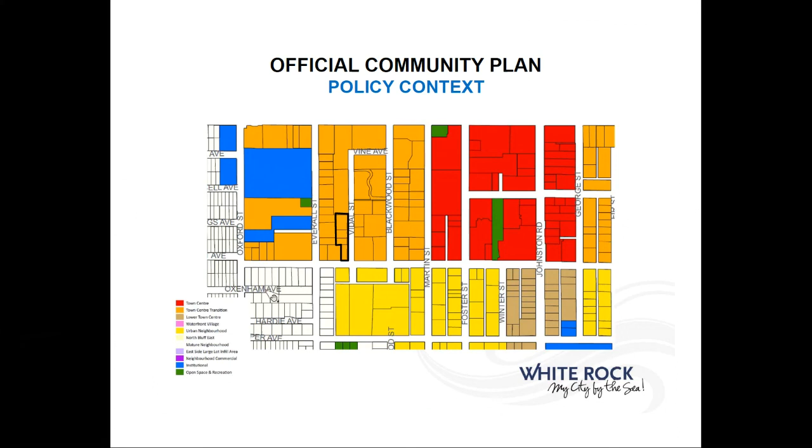I mentioned low to high-rise buildings, and a lot of the discussion tonight may relate to building height - what is a low-rise building, what is a high-rise building. We have a figure in the official community plan that looks at, essentially, a height schedule, looking at potential heights within different parts of the city. You can see the subject properties shown on the screen here with the star. They're within the range of the 12 to 4 transition area moving away from the town center.

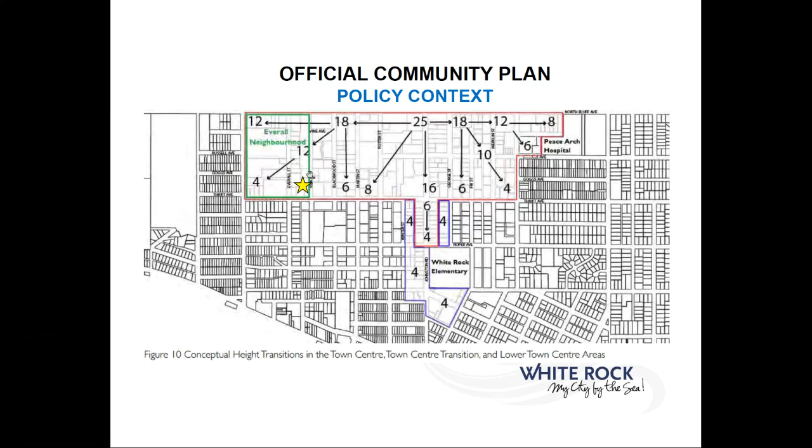In the town center, we have a concentration of taller buildings, 25-story buildings, moving southward down to 16 along Johnston Street, then moving west along Thrift, we transition to 8 and 6, and again moving south from North Bluff Road from 18 to 12 to 4 at Oxford and Thrift.

We also have a measure of density. Density in the OCP is considered on the basis of a floor area ratio, which is a multiplier to the size of land. So if you have a 1 acre parcel and a 1.5 FAR ratio, you get 1.5 times the area of the lot in allowable gross floor area of development. In this particular case, the subject property is within an area where 1.5 FAR is considered.

There are some other policies that I'll speak to that allow for increases to that density, or gross floor area of construction, based on the tenure of housing proposed.

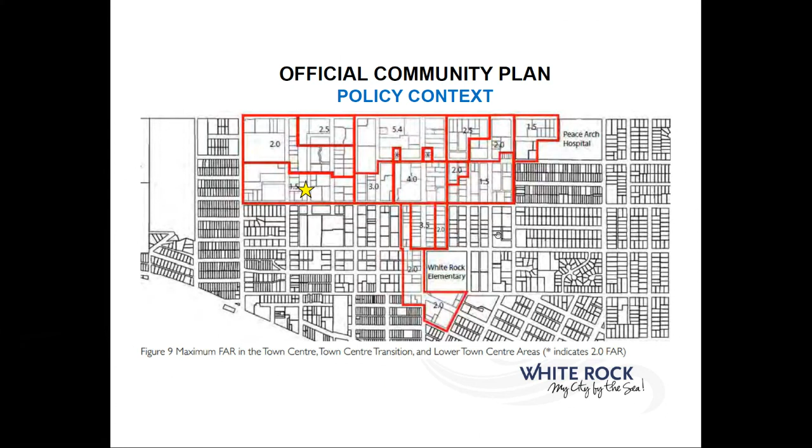As I mentioned, the project is for a rezoning application or a zoning amendment in addition to a major development permit. The property is within the multi-family development permit area. The development permit is really intended to manage and control the form and character of the development.

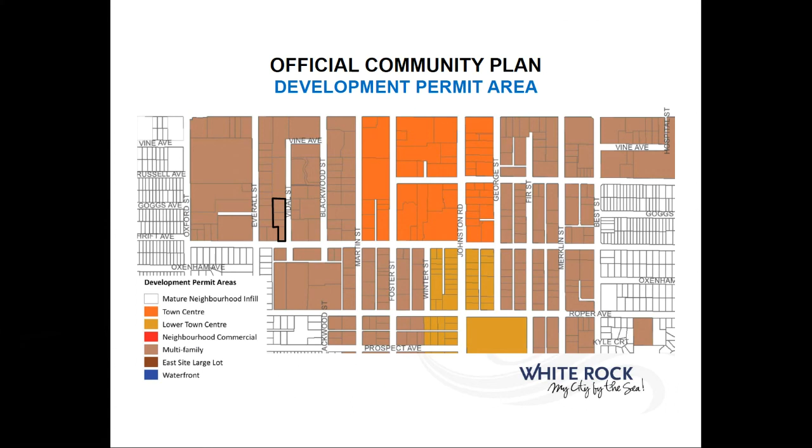I'm going to leave it with the architects from Keystone to go through the design elements of the project and their alignment with some of the DP area guidelines. So with that, I'm going to turn it over to Kim Moust, who is a representative and the vice president of real estate at Weststone Group. So Kim, did you want to share your screen and provide an overview of Weststone?

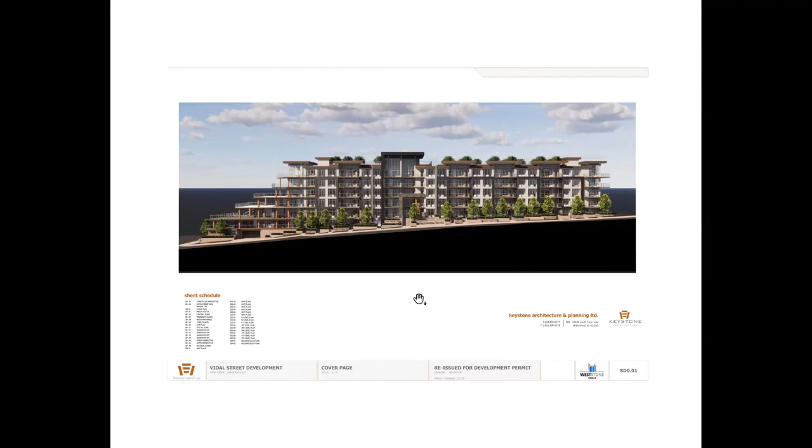Okay, thank you, Greg. My name's Eric Poxletner. I'm a senior architect principal here at Keystone. Noel Lim is the project lead. He's going to walk you through some of the specifics.

Just as an overview, the project is specifically designed with an intent to maximize views toward the south and create a low level, sedimentary approach that follows the site and allows to maximize views from all the neighboring properties. The design comes out of a more natural material, West Coast modernist typology that fits in with a lot of the neighboring and adjacent vernacular architecture in White Rock, with stone, glass, and wood elements. The intent is to feel like a hillside building, unobtrusive, and a wonderful place to live with great rooftop and large balconies to the south.

The main entry is along Vidal Street, with glass elements and stepped stone and wood elements along that side, with points of entry along the ground floor plan, so it feels like a low scale building and fits more into a human scale neighborhood. With that, I'm going to turn it over to Noel to talk a little bit about the specifics of the project.

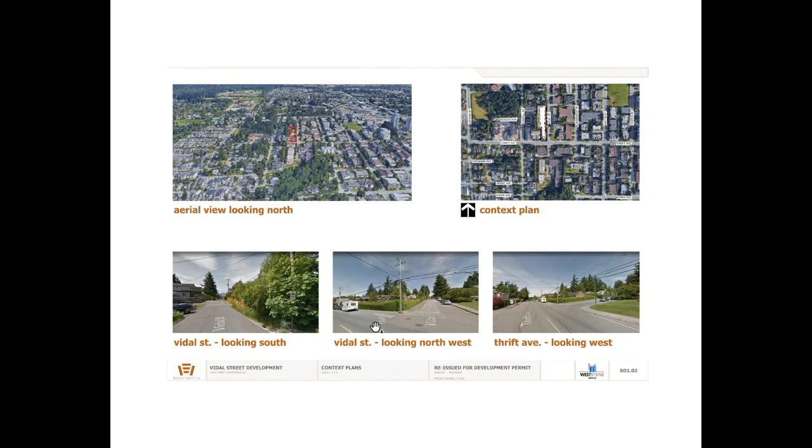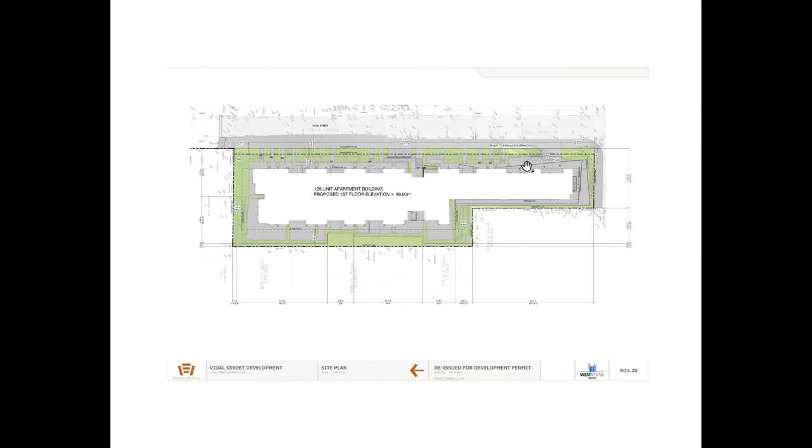Going through the parkade, the access ramp accesses the parkade at level P2, adjacent to the loading zone, and the waste collection is also near the entrance to allow for easy access for garbage collection. There are 19 EV stalls currently located on P2, 3 of which are for visitors and 16 of which are used for residential.

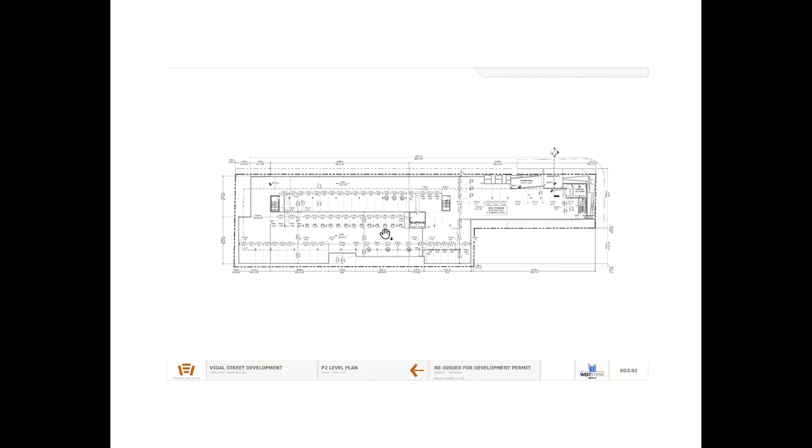The bike storage facilities are located on the P1 level, with access to the exterior via a door adjacent to the main entrance. There are 39 visitor stalls provided on the P2 level, as well as 155 residential stalls provided on all 3 levels, secured by parking gates. There are a small number of residential units on the P1 level, which peek out due to the slope of the site, and the service rooms are also located on P1.

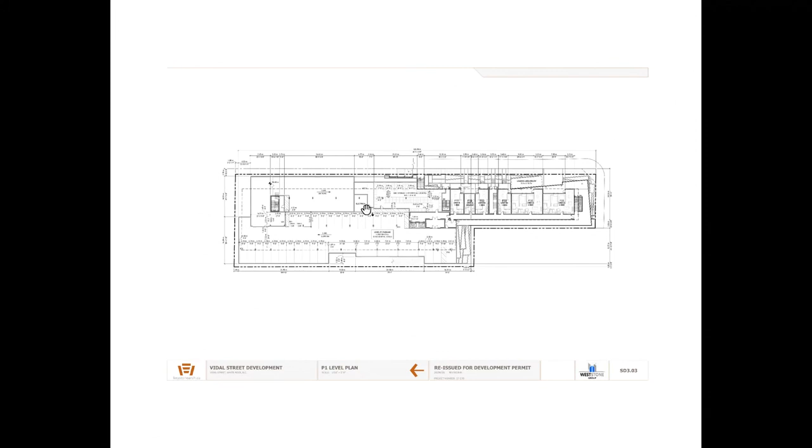On the first level, you can see that the main entry is again near the center of the building. And we've also provided walk-up access to units ranging in size from studios up to 2-bedroom units.

The first of two amenity rooms is located on the south end of the project, with a large amenity deck to the south to maximize the views. The interior space is about 1,200 square feet, and the exterior amenity space is just over 2,000 square feet.

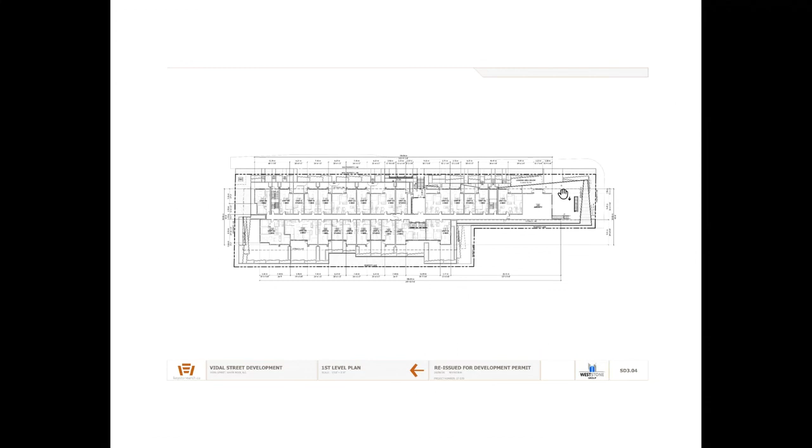Moving up to the second floor plan, there is another amenity space just over 500 square feet, and another deck just over 1,800 square feet to finish off the interior and lower portion of the amenity space.

Moving on to the 3rd through 5th levels, our unit mix includes 25 studios ranging from 323 to 373 square feet, 55 one-bedroom units from 446 to 547 square feet, 36 two-bedroom units from 585 to 978 square feet, and finally 13 three-bedroom units from 918 to 1,063 square feet.

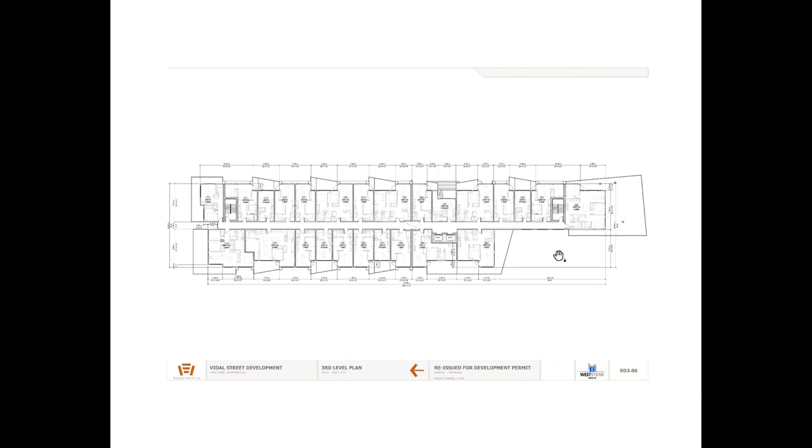Lastly, to close off our amenity space, we have a rooftop outdoor amenity deck with the majority covering the roof, totaling 9,775 square feet of outdoor amenity space.

Now I'll pass it back to Eric to go through the architecture.

Speaking further to outside amenity spaces and walkability and livability, in terms of how we approach the architecture, there's a lot of landscaping along the perimeter, with stone, stepping, and terracing.

In terms of materiality, we used wood posts and metal panel to finish off some of the exterior elements, with some slate-like flat stone material around the entrance and manufactured stone along the perimeter.

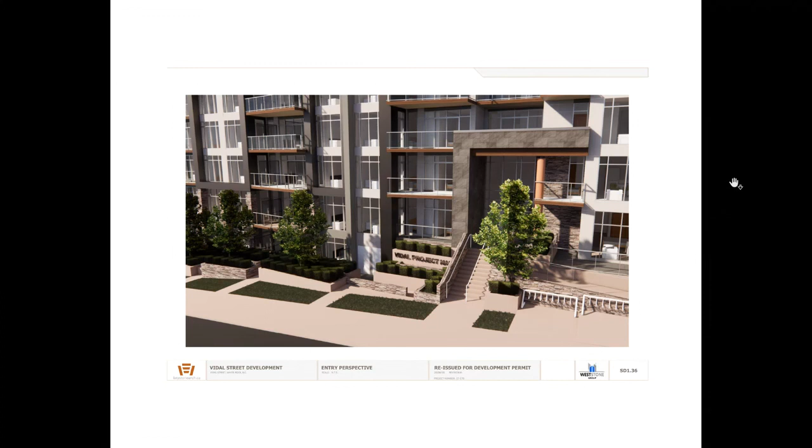There's the main entry coming into the building with bike racks along there, and landscape terraced areas as it moves down the street.

That's to the north of the project, facing the existing site up to the north. Generally we're trying to keep the scale of the building feeling very human scale, not obtrusive.

I think I'll turn this over to landscape. Did you want to go over it?

This is just a section showing the existing building to the north of Beverly, and how there was careful thought in this building to try to keep good views from that building out down toward the ocean.

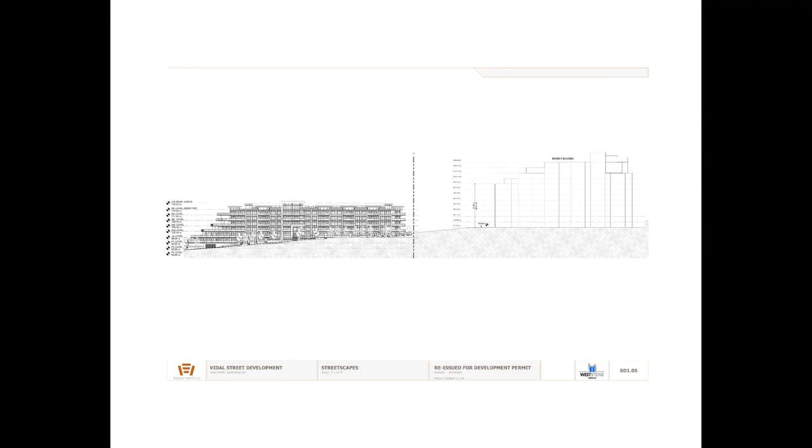I'm just going to go through some CPTED crime prevention principles, some sustainability principles, and a brief overview of the traffic report.

We've allowed for clear viewpoints throughout the site. Residential windows and balconies all look over the site to make sure that there are clear visibility lines.

There's going to be a secured underground parkade for residents and visitors, and site lighting will illuminate the public areas. In terms of natural access control, there's one clearly defined residential entry point.

And as Kim has gone through, there's an extensive maintenance and management program already instituted by Weststone.

Bike parking includes 129 tenant bike stalls and 27 bike rack units on the exterior. We also have an allowance for 19 electrical cars, as we've gone through already.

We plan to meet or exceed all of the new energy and ASHRAE code requirements. Exterior lighting will be dark sky compliant and use LED fixtures.

We have located our underground parking underneath the building to minimize asphalt and maximize landscaping, which landscape will go through shortly.

For the traffic highlights, the study area is located in close proximity to existing transit routes and regional cycling routes. There are existing pedestrian facilities provided on the study roadways as well.

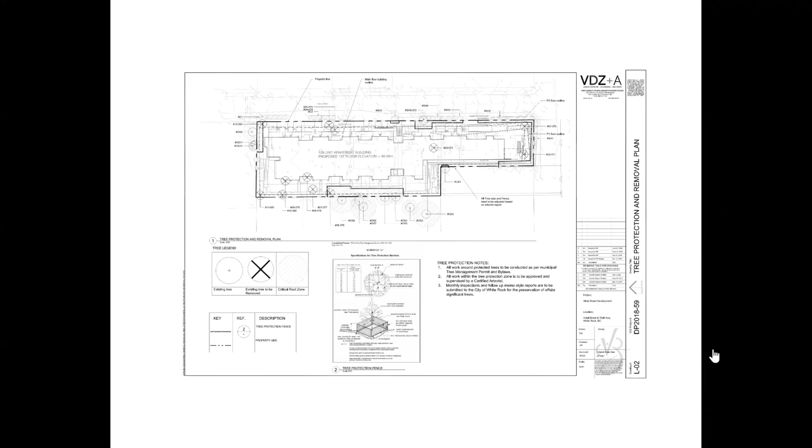Good evening, everyone. I'm Derek with Van der Zalm + Associates, and I'm going to briefly take you through the landscape for the Vidal project here.

Firstly, I'm going to draw attention to the extensive work that has been done to ensure that all of the offsite trees to the west and north have the best opportunity to continue to grow and thrive. Along the west side, we've had arborists on site to map how much of a critical root zone there is. The building envelope has already been adapted so that it will not impede into those critical root zone areas, as well as to the north along those existing trees. Arborists will also be on staff during excavation to monitor these trees and ensure they have the best chance to continue to thrive and grow.

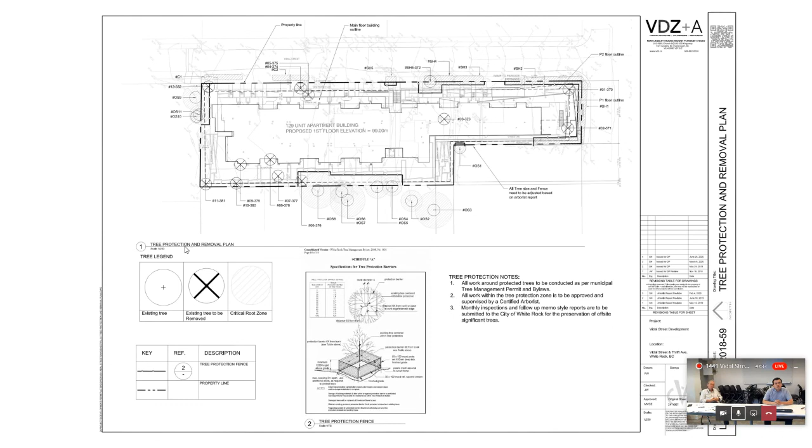Now we're going to work our way from the bottom up and take you through some of the landscape elements. This is the P1 level, showing some of the tiered landscape that works with the idea of a running downhill, tiered hillside, as well as showing some of the private patios for units on the P1 level here.

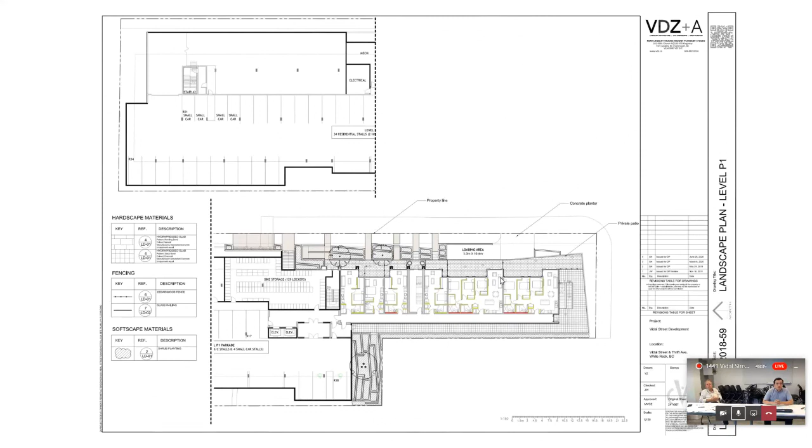For the main level, we once again have the tiered landscape along Vidal with retaining walls building up to the private patios, providing a bit of privacy so people can be outside and enjoy their outdoor space while having a nice landscape buffer between them, as well as along all the edges of the building. There are private patios on the level 1 floor, and then down into the amenity area on the south side overlooking towards White Rock. Here we have lounge chairs and sun decks, as well as planting and casual seating to allow people to come outside and make use of the space and the views from this area.

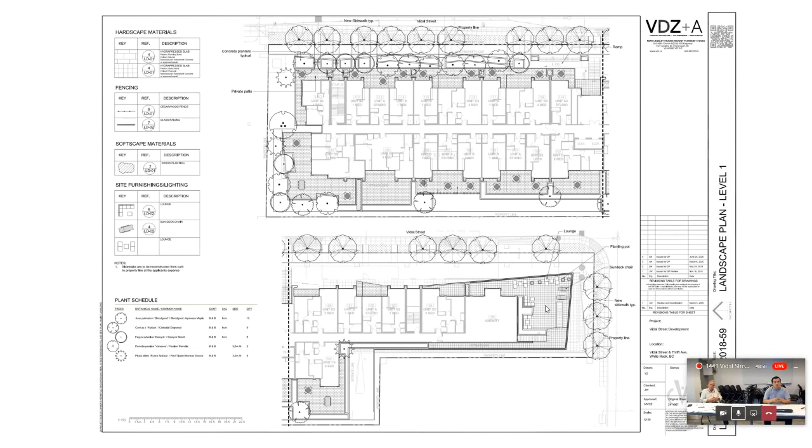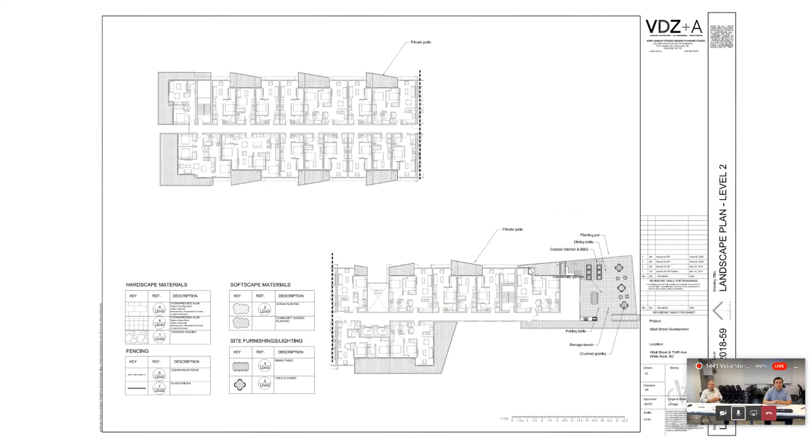Moving up to the level 2 plan, we have private patios as well, and mainly the amenity area where we are featuring an outdoor kitchen, harvest tables and casual seating, as well as community garden boxes and a potting table to allow people to come and enjoy the sunshine and the views.

Finally, up to the rooftop, where we are featuring raised planters to green up the roof, allowing trees to grow as well as shrubbery, and also bringing in a graphical element to the design with a green roof and pathway through there to make it interesting to look at, as well as having a trellis, casual seating, and built-in seating with fire pits to allow the users and residents nice amenity areas up top. And finally, with some movable tables and chairs, and a dining area to once again bring people out, looking closer to the views to the south.

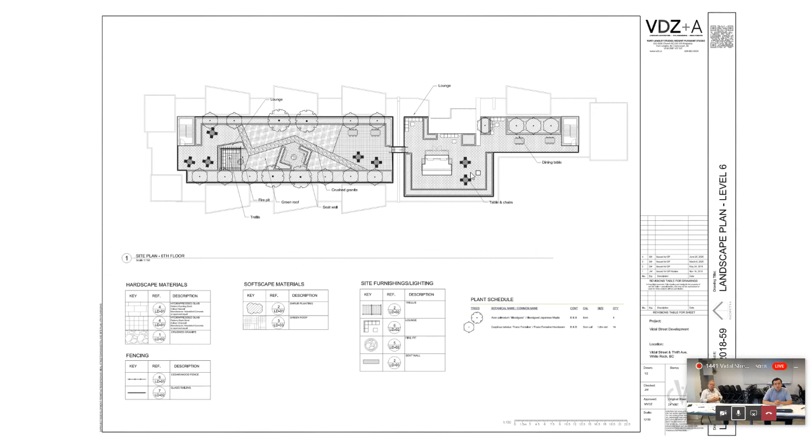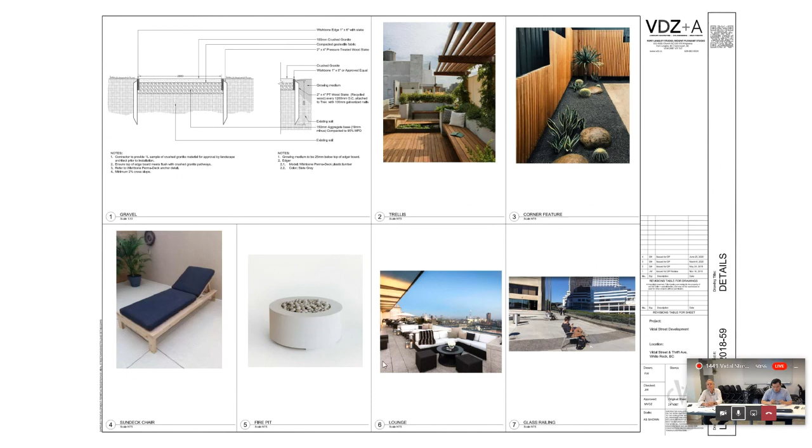This is just some of the grading, showing that we're being cognizant of the offsite conditions and trying to work it into the landscape, and then showing some of the character of the landscape elements we're proposing, playing off of the architecture with the wood and metal beams, as well as some graphical landscape elements that become a focal point within the landscape itself. Fire pits and sun decks, lounge chairs, as well as glass railings across.

Going into the green roof, using sedum and such to make it have a bit of a graphical representation across the top, and then the built-in seat walls, community garden, and outdoor kitchen area.

And I believe that is all I have for landscape. I'm not sure who's going to be taking over from here.

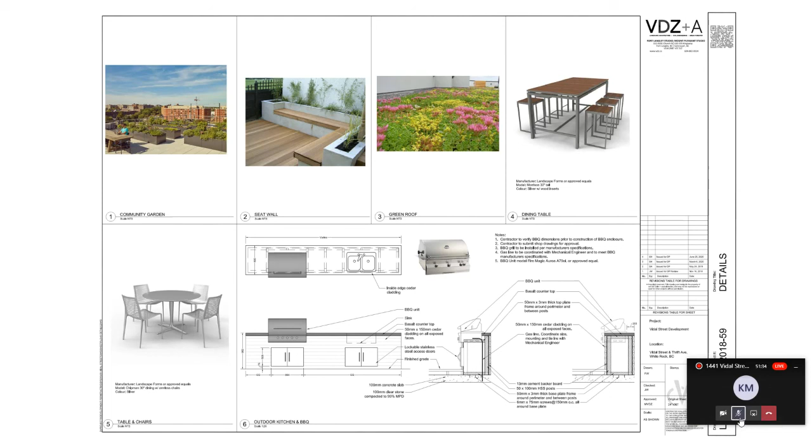Hi there. Sorry about that, I'm troubleshooting some issues on the other end. I'm going to share my screen again, so...

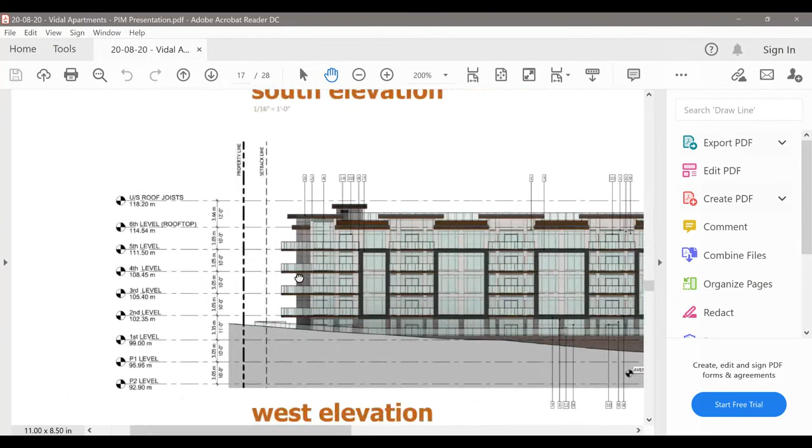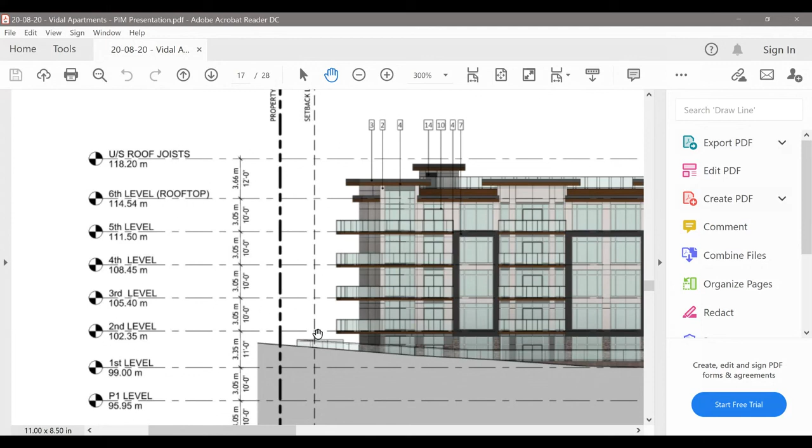Sure. So this would be the north side on the west elevation, showing the first story essentially below grade with some allowances for patio spaces. So you are correct, it is about 4 stories, including a rooftop deck amenity - 3 was a little bit under. But as you can see, it is substantially lower than the 6-story height shown on the south side of the site.

Okay, thank you, Noel. I've published a couple other questions if you want to speak to them about how the roof deck may contribute to building height. The question is, does the roof deck effectively make it a 7-story building?

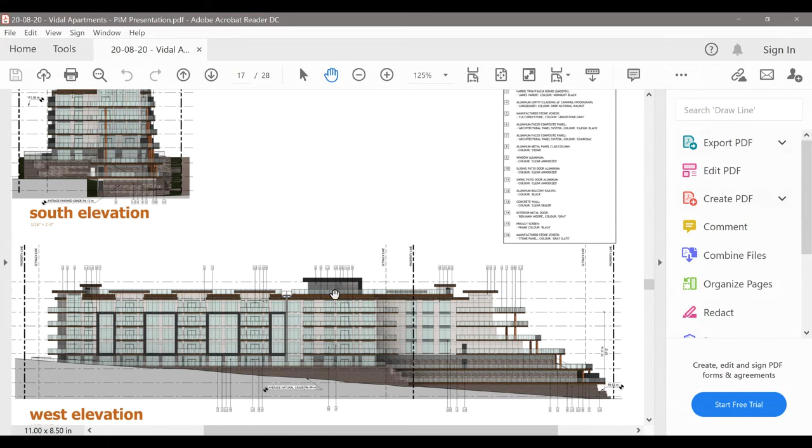So the only portions of the building that stick up above the 6th story are the stair cores and the elevator core. By code, that doesn't qualify the building as a 7th story, and they are minimal in terms of actual footprint of the roof, so they don't really intrude or create too many shadow lines from that height.

Okay, thank you. A couple related questions: is it a wood frame building or a concrete building? It'll be non-combustible, so concrete.

Changing themes a little bit, there's a question about accessibility. As mentioned in the parking summary, the parking plan proposes 5 barrier-free spaces. Will any of the units be designed to be accessible units?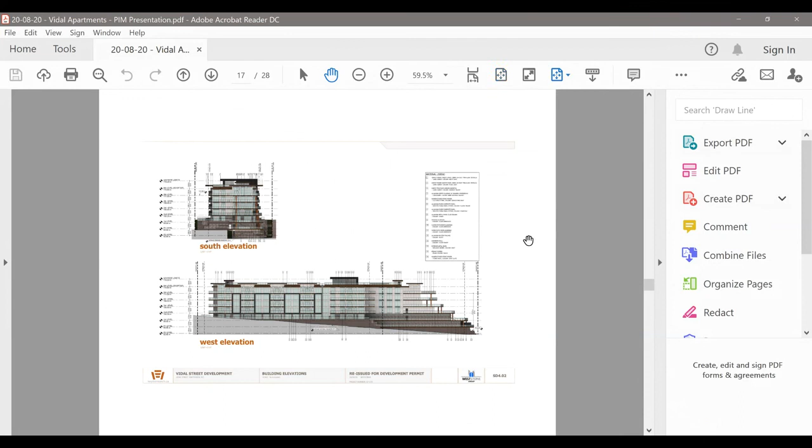I believe we have allowances for it right now, and that'll be on a per client basis. If our client Weststone believes that more spaces are needed, then we'll account for that. In terms of the unit composition itself, will any of the units themselves be designed for accessible access? Currently, they are not.

I'll publish there's a question here. Sorry, Kim. Hi, Greg. We will make accommodations for some of the units to be handicapped accessible, and may also ensure that we have pre-wired for automatic openers so that doors are accessible. So we will certainly be making accommodations for accessible units going forward. Okay, thank you.

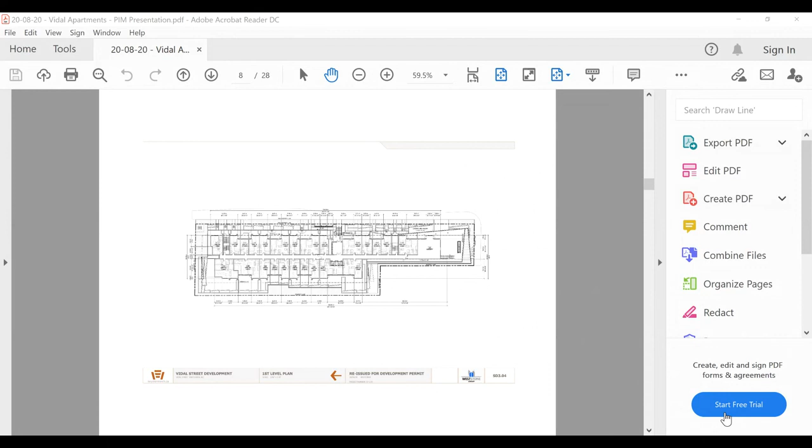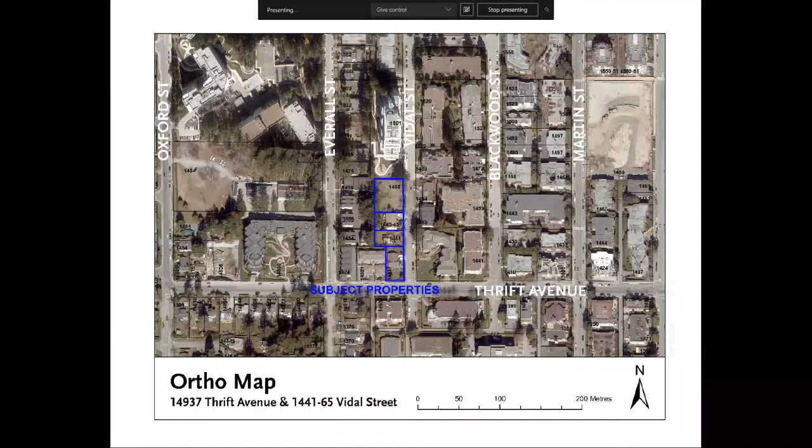I published a question. It says, to clarify, the proposed upzone increases maximum units from 12 to 129 and increases density to maximum allowable under OCP with the rental density bonus. And that's correct. So the proposal is proposing 129 rental units with a 2.1 floor area ratio, which would be the 1.5 recognized in the OCP plus a 40% increase with the dedication to rental tenure units.

I think perhaps I'll ask Jonathan to take the next handful of questions regarding parking and the traffic study. So there's a comment about parking already being a problem on Vidal. How will that be managed with the massive increase in residents on a quiet street?

Maybe Jonathan, I can start on a couple of the ones regarding on-street parking, and then if there are related ones about the actual traffic, I'll direct those to you.

So the one thing I wanted to point out on the on-street parking: right now there's only parking on the east side of Vidal. As part of the project, the city is looking for a dedication of land, a widening of land, to ultimately support a more complete street arrangement. So as sites are redeveloped along Vidal, the city has an opportunity to seek a dedication of land, a widening. That would be sought, and has been communicated to the proponent in this case, to eventually have sufficient road width to have 2 lanes of traffic and then parking plus a boulevard and sidewalk on both sides of the street.

Regarding... I'm just reading the questions as we go to make sure I'm grouping them. So Jonathan, a question here.

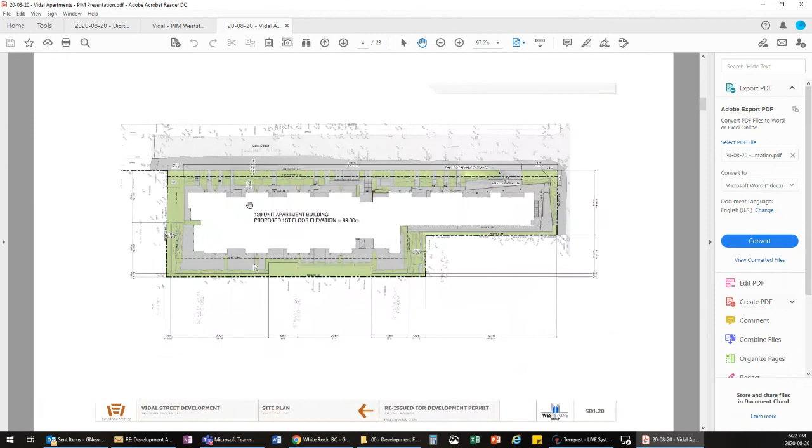A question about the setback of the building from the north side. I'll put the drawing up on the screen. There's a question about this 3-meter setback at the north end of the building, where the standard in the high-density residential, multifamily apartment style zone is 6 meters. I wanted to clarify that the 3 meters proposed largely encompasses the open-air balconies and portions of the parkade, whereas the actual tower portion of the building is closer to 6 meters from the north property line. So on plan view it looks like a 3-meter setback, or that's what's labeled on the drawing, but the actual setback of the structure, based on our measurements and review of the file, is between 5 and 6 meters. Just to clarify that point.

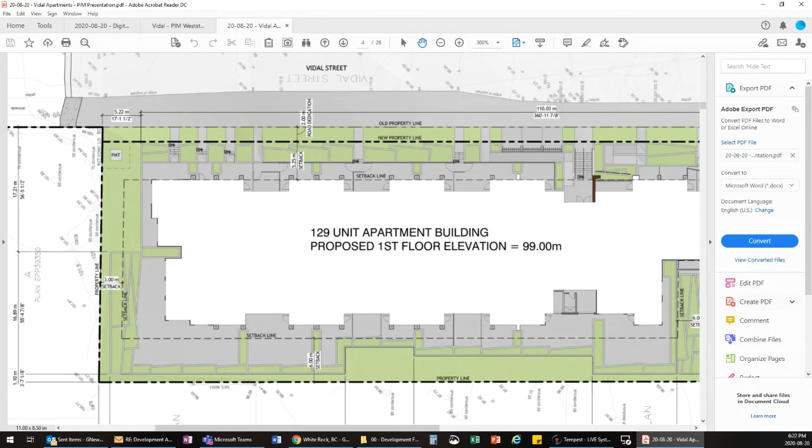A question about community amenity contributions. Because the project is seeking additional density, going from what the zoning would generally allow, around 1.75, up to 2.1, the rezoning process gives the city the opportunity to have a conversation about community amenity contributions. If council wishes this project to proceed, we would be having those conversations with the applicant. One type of amenity that can be provided is cash put into an affordable housing reserve fund, or direct allocation towards affordable housing units. That's something we can certainly discuss with the applicant as the file proceeds.

There's a comment about potential impacts of the project to someone's home-based business. I don't know if that relates to concerns during construction or afterwards. I think it's reasonable to acknowledge there would be some short-term noise and dust generated by development of the building. There certainly will be, but we will be controlling dust with wheel washing stations, and the noise will be within bylaw, so we'll make sure it doesn't start too early, doesn't go too late, and that Sundays are quiet. Standard rules, and we'll do everything we can to mitigate noise and dust throughout construction.

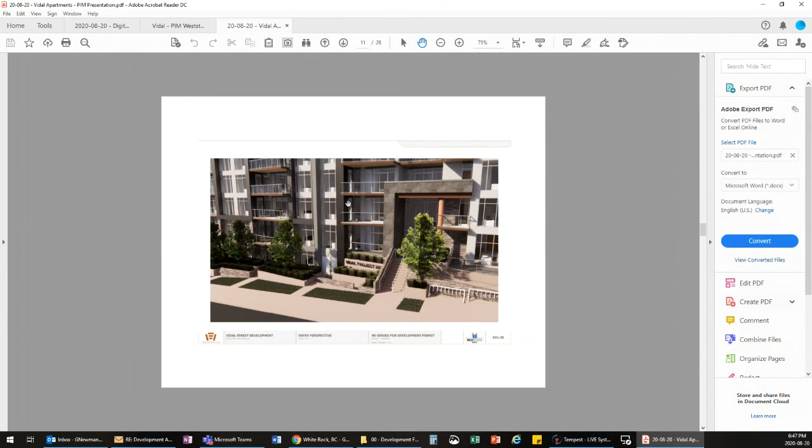I'm not sure if Derek from the landscape architecture team wants to speak to any of the stormwater management controls being contemplated. There were some rooftop plantings in the designs that may have value for stormwater control. Yeah, I can talk a little about that. Overall, we typically get into stormwater management farther down the process, but there are systems we're looking at for the rooftop that help with capturing and storing water, then using it on a time release basis to let the plants soak it up. That's definitely something we can consider and are looking at with this project. Okay, thank you.

There's a question along the line of whether the project would be contributing to affordable housing—would there be any below market housing included in this particular project?

It's not our intent to do any social housing in this project. As I said, there will be some units offered to residents currently in Weststone-operated White Rock residences at below market rates. But other than that, our intent is to go with market rents at this time.

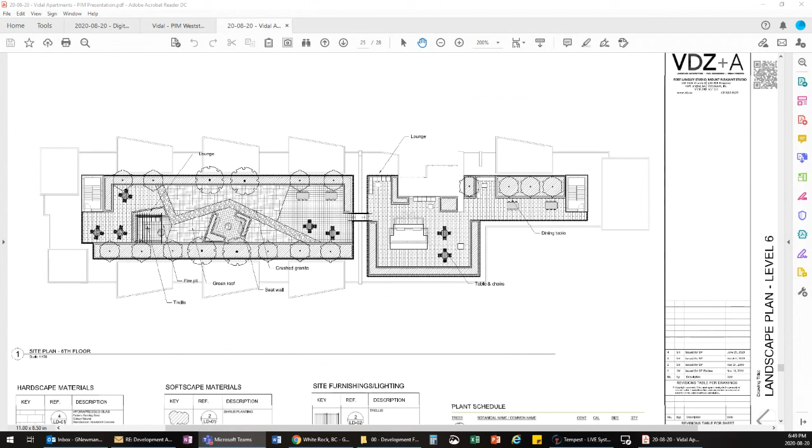By the very nature of the suite sizes, that will be affordable in a product that isn't currently in the marketplace. Are you comfortable offering any sense of the range of rents you might be anticipating? Since the project is well over a year or two away, it's really hard for us to set those rates at this time. We normally don't do that until we get closer to releasing it to the marketplace.

There's a comment about what aspects of the building would be considered West Coast architecture. If Noel or Eric want to take that one.

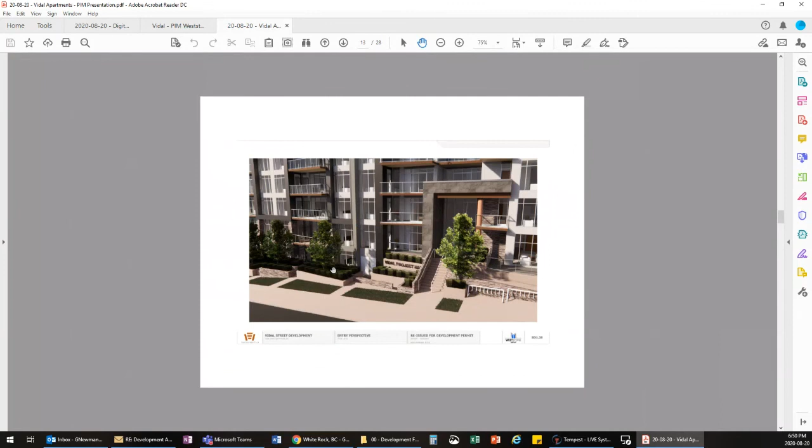West Coast architecture is kind of a broad term, but the reference here is more West Coast modernism, which includes elements like strong horizontal lines, as you can see with big large balconies, wood columns, wood beams, the use of glass and transparent materials, and stone. That's referencing some of the local architecture with a West Coast appearance.

That is part of the multifamily residential design guidelines, and that is something city staff are evaluating this proposal against, so we appreciate the comment.

There's a question about the residents of Moritz Manor and whether they would be accommodated by this project. The development plans for Moritz Manor are much further behind than this project, which would go into construction much earlier. What I have promised to the Moritz Manor tenants is that they would have an opportunity to move into this building early if it is completed before Moritz Manor, at the same rates as they would have moved into the replacement building at Moritz Manor, which is probably 5 years away.

There's a question about whether there would be age restrictions within the building. No, short answer, no age restrictions.